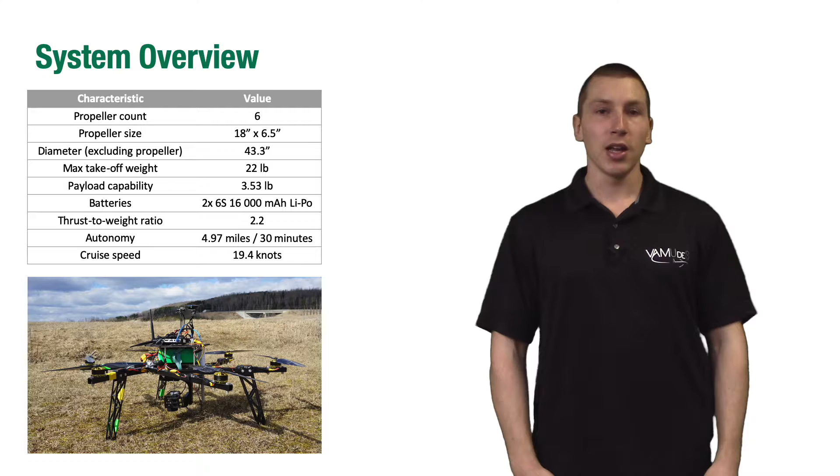This year's flight platform is our hexacopter Orion. It weighs 22 pounds and has a diameter of 43.3 inches. Using values from the AUVSI 2018 competition, it has an autonomy of more than 30 minutes and about 4.97 miles at a speed of 19.4 knots. It has a thrust-to-weight ratio of 2.2.

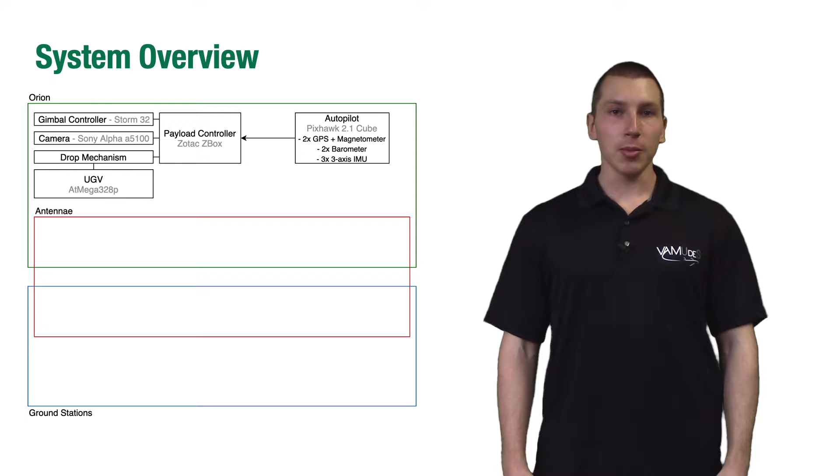Orion's main components are the autopilot, the UGV, and the payload controller, which controls the gimbal, the camera, and the drop mechanism. Orion communicates to the ground control station using 4 different links.

First, a 5.8 GHz omnidirectional antenna for the payload link. Second, a 2.4 GHz antenna for the pilot link. Third, a 900 MHz RFD 900 Plus for the telemetry. And also a 915 MHz 3DR antenna for the UGV.

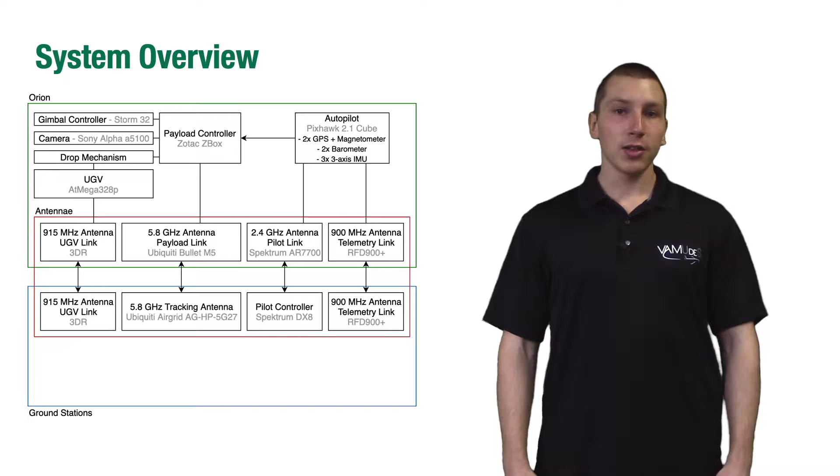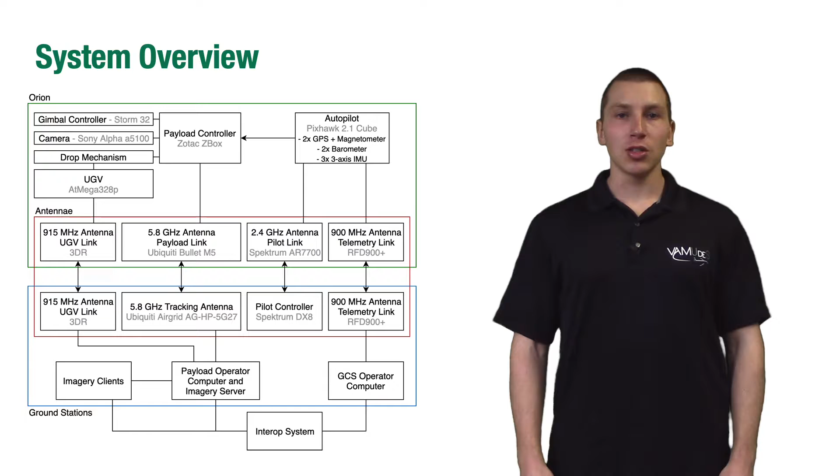All the ground control station computers are connected to the Interop system. The payload computer receives the images and sends them to the imagery clients. The GCS computer sends the telemetry to the Interop system, and the imagery clients tag the images and send the target to the Interop. All tasks will be attempted at the competition.

We have high confidence in the autonomous tasks: the waypoint navigation, the stationary obstacle avoidance, as well as the object characterization, geolocalization, and actionable tasks. However, we have medium confidence in the air delivery drop and drive-to-location task, since it has never been tested in competition.

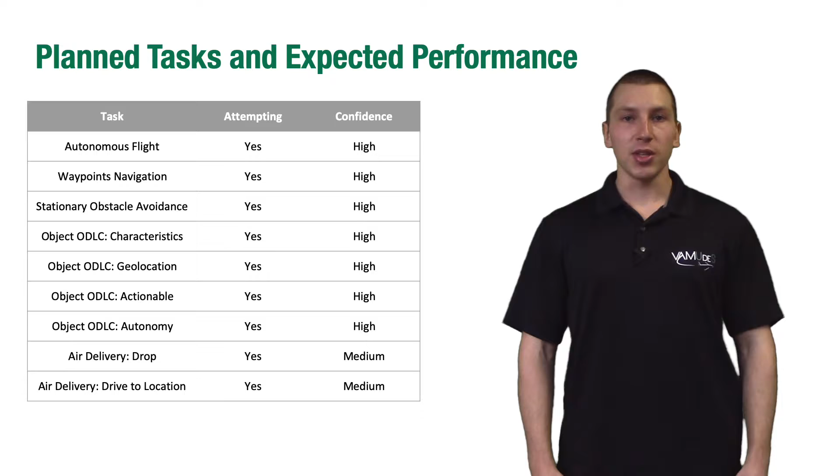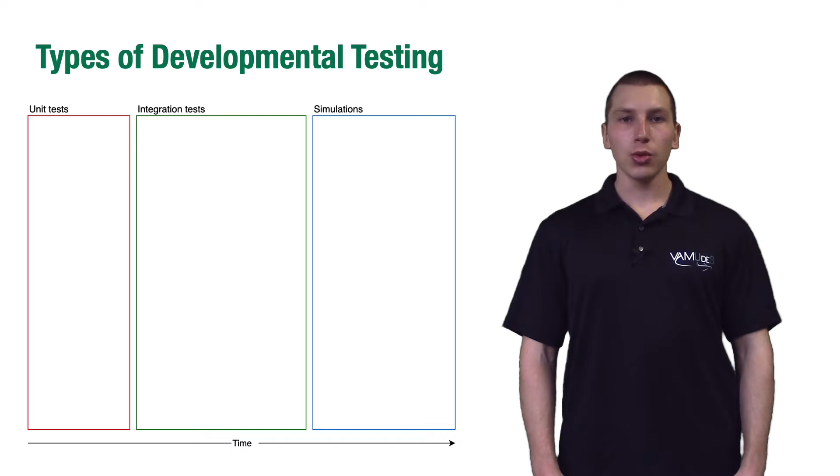Many tests were executed throughout the year to ensure the platform is working as expected and to reduce the risk of crashing. These tests are separated into 3 different categories: first, the unit test, then the integration test, and lastly the simulations.

The unit tests are where every subsystem is tested individually. Once they are working as expected and do not represent a danger for the UAS, they are integrated into the UAS. Integration tests ensure every subsystem works together and does not interfere with each other.

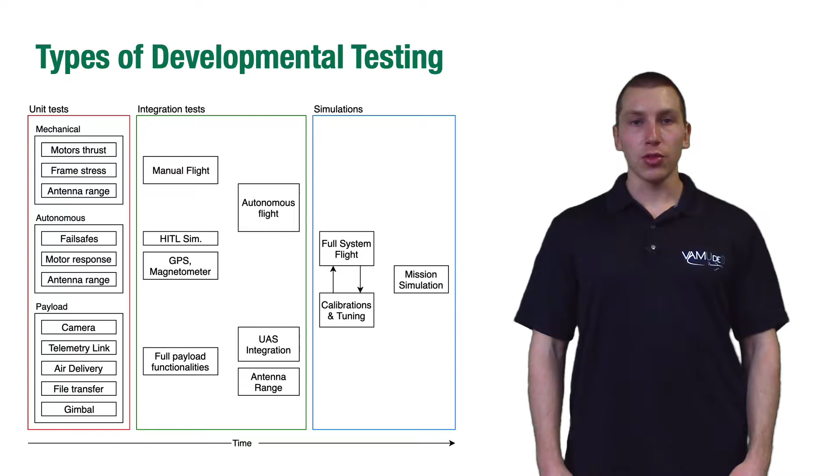Lastly, simulations. Every system is tested in the air, running several practice flights. Once every system is working, full mission simulations are conducted.

For the autonomous flights, we started by testing and calibrating our autopilot. After, we tested the different systems on the drone, such as the ESCs and motors, to see if they responded correctly to the commands given by the autopilot; the antennas, to make sure they were reliable at least 2 kilometers at a speed of 64 kilobytes per second; the magnetometer and GPS, to ensure it knows its position and attitude; and the fail-safes, to make sure that in case of a failure of the drone, it remains safe for the surrounding people.

Since all the systems worked perfectly on the ground, Orion was then tested in flight. During its first flights, the PID was adjusted to optimize flight time and precision.

Since the drone flew perfectly well in manual modes, autonomous flight modes such as auto takeoff, auto land, and autonomous flights were tested without the payload to begin with, and with the payload afterwards.

Since then, the UAV conducted different autonomous flight operations, including 3 different competitions in full autonomous mode. Since the UAV hasn't changed from last year's competition, we are really confident of the accuracy of the waypoints. In fact, last year we had an average accuracy of about 3 feet, and we hope to do even better this year, because our flight tests show we can go down to an average of 1.5 feet.

For the autonomous flight planning, first we connect to the Interop to retrieve mission details. We can see on the map the airdrop location and the obstacles. After, we create a flight plan that achieves waypoint, airdrop, and search area tasks.

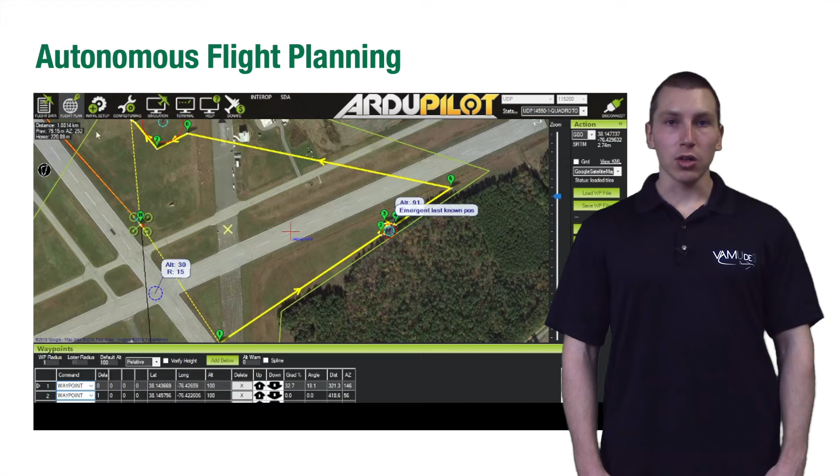Lastly, we reroute the flight plan to avoid obstacles. Obstacles are avoided by creating waypoints around every obstacle at a safety range of 10 feet.

The imagery system is composed of a 24-megapixel Sony Alpha A5100 camera, as well as a custom-made 2-axis gimbal that is made to be small and lightweight. The imagery system has been tested several times in the air, as it is also used for another competition.

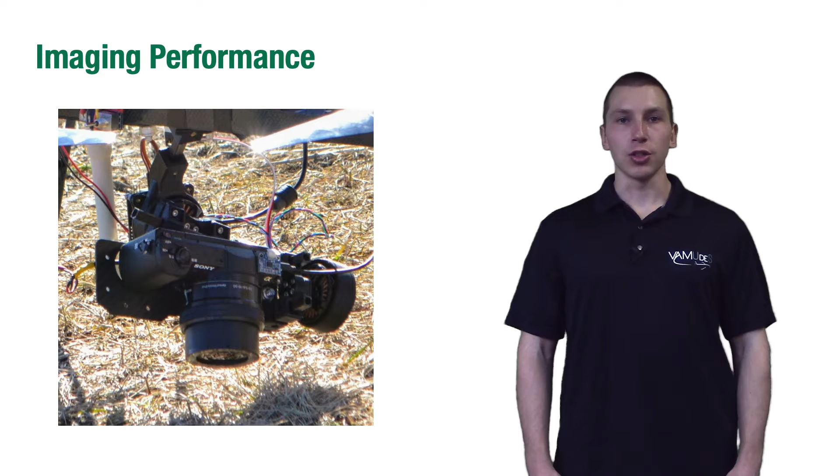The payload link is connected to a 360 degree tracking antenna that is used to transfer the images and command the payload controller. It achieved a data rate of 65 megabits per second at a range of 1 mile, which is more than twice the required bandwidth and more than the estimated distance that we will fly at the competition.

Camera settings are set to optimize image clarity. Shutter speed is set to compensate for vibration and aircraft speed. Rubber dampers are installed to reduce camera vibration, and we use a manual preset focus to avoid blurry images. We can use a fixed focus because the ODLC task is achieved at a fixed altitude of 170 feet.

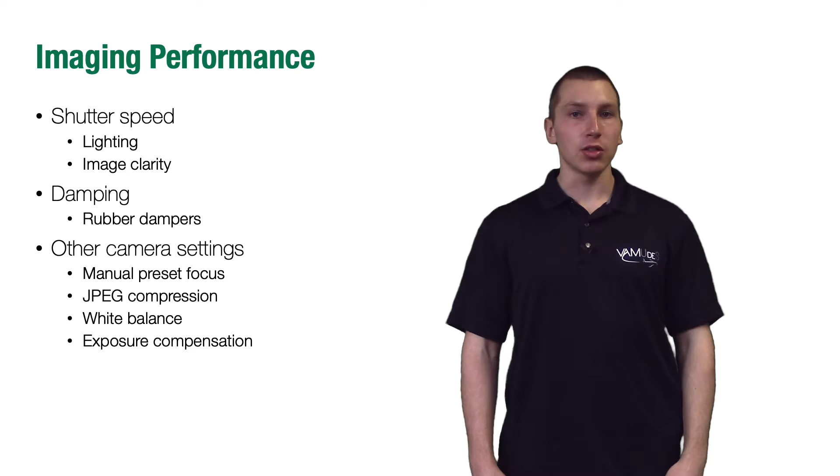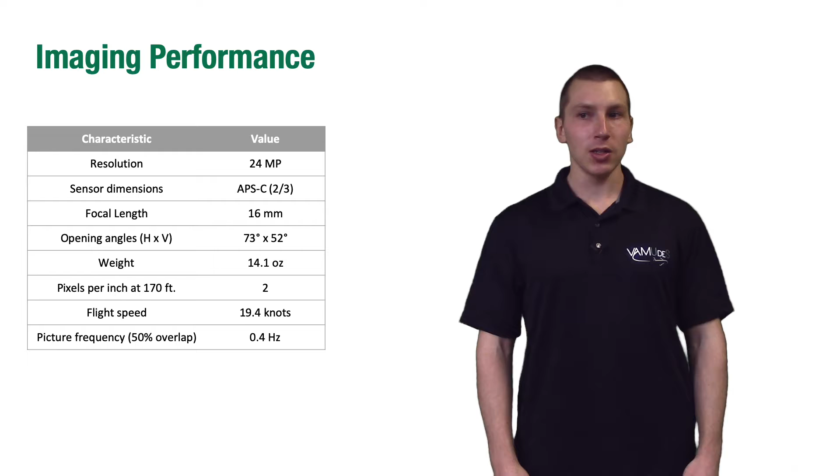White balance and exposure compensation are adjusted to characterize targets more efficiently. With a 24-megapixel camera, it gives a 2 pixel per inch resolution at 170 feet of altitude, which is enough to identify targets. 0.4 Hz picture frequency at 19.4 knots of speed gives 50% image overlap to avoid missing any targets. Here are 2 images taken from last year's AUVSI competition.

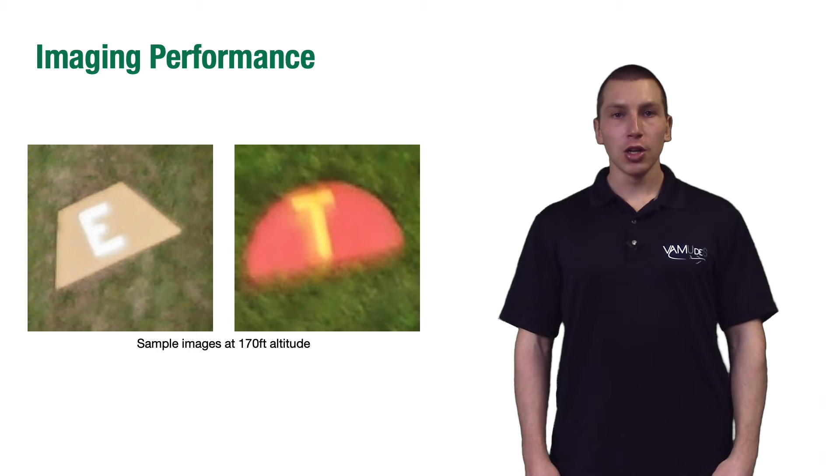We can expect slightly better image clarity due to the new shutter speed setting and the new gimbal damping.

To improve localization performance, 5 practice flights were made to calculate the time compensation needed between telemetry and image timestamps. Delays are needed to compensate for sensors, data transmission, and telemetry update frequency. During practice flights, 26 targets were located at an average accuracy of 7.7 feet.

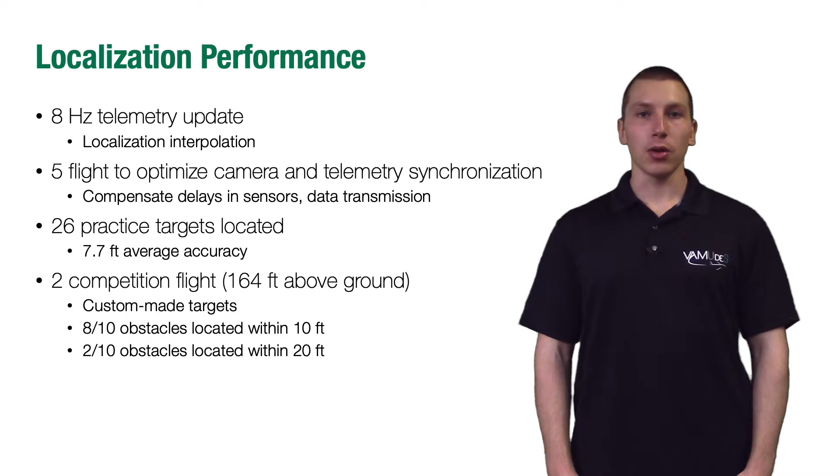2 competition simulation flights were conducted at an altitude of 164 feet. During the simulation, 8 out of 10 targets were located within 10 feet, and 2 out of 10 targets were located within 20 feet. Location accuracy was calculated using photogrammetry software Agisoft, which creates a map of the zone and calculates error in location of each image.

Camera, telemetry, gimbal, and file transfer are all tested individually before installing them on the UAV. For example, manual and automatic camera trigger are tested, as well as making sure that the telemetry matches the image's location. Integration tests are then conducted, and systems are optimized to achieve a maximum score at the competition.

For example, photo geolocation is optimized to compensate for camera delays in sensors, tracking antenna positioning and offset is optimized to achieve a maximum data rate, and automatic camera start and stop for the search area is tested to make sure that the camera starts at the beginning of the search area and stops when exiting it.

To ensure the payload operator is aware of the payload air controller state, live visual feedback is shown on the ground control station payload software, Nexus Command.

The automatic detection and classification of the image will be done in 4 steps. The table below outlines the different tools and manipulations used in each phase of the analysis. First step, we will find areas of interest in the image. If the operation is a success, we will find a shape in the area of interest. Third, we will find a letter in the shape. And finally, we will find the color of the shape and the letter.

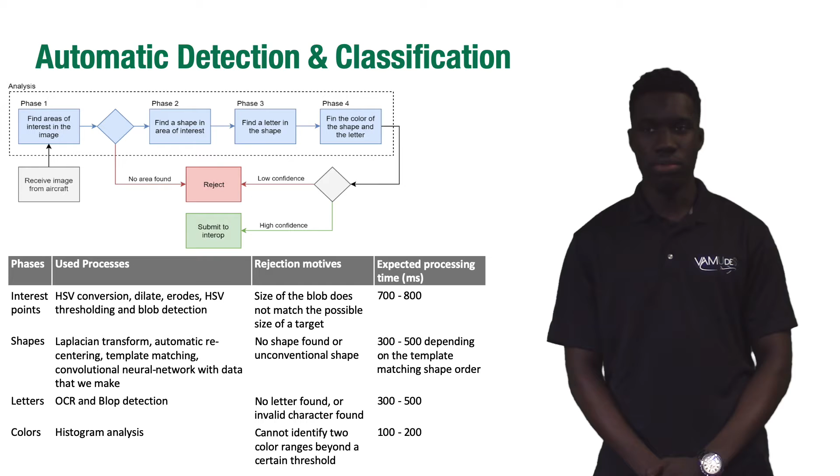This solution was developed preferring false negative to false positive. We test the system by using past year competition images.

In our test, the system was able to find every target. The hardest target to find was the yellow and orange star.

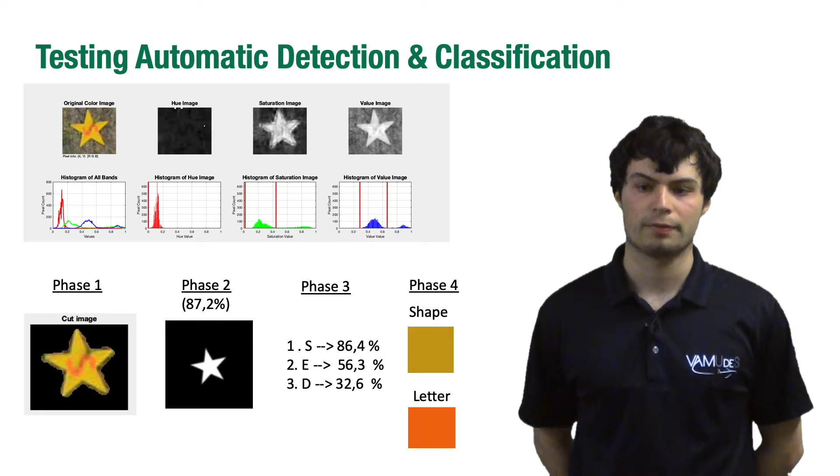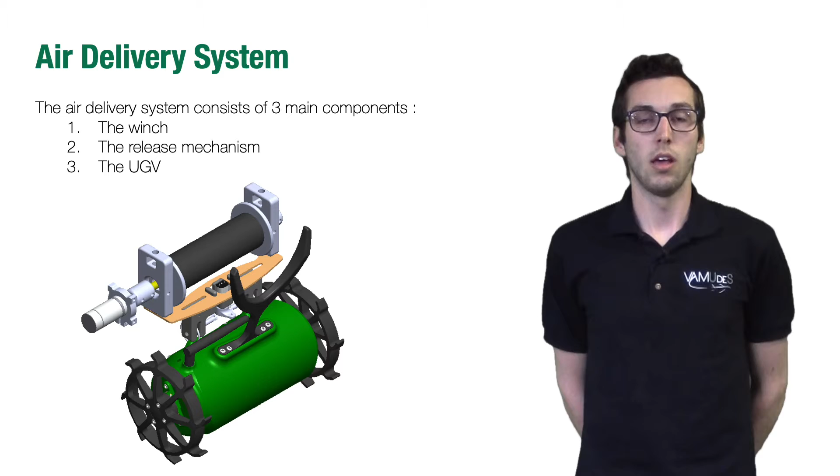This year, air delivery was a real challenge. To achieve this task with success, the team chose to use a winch combined with a custom release mechanism. This system allows us to drop the UGV gently while respecting the minimum altitude of 100 feet with the UAV.

The UGV will transport the water bottle during all the mission. It will be delivered from the UAV by a 100 feet long winch. Once released on the ground, the UGV is able to move to a different target.

The UGV is a complete custom design from the team. It is equipped with all the necessary components and telemetry to achieve the task. The UGV has a special design, giving us the opportunity to transport a water bottle while being the smallest.

A two-wheel drive configuration was chosen to save on the number of motors and wheels to keep the weight as low as possible. Two small DC motors ensure the UGV motorization. They are capable of rotating at a speed of 90 RPM, giving a linear speed of about 1.85 feet per second. Finally, the UGV has an autonomy close to 22 minutes, which is more than enough to achieve its mission.

The UGV control system is built around a custom ATmega328P based autopilot. It contains a 3-axis magnetometer, gyroscope, and accelerometer. There is also an altimeter and a GPS receiver for accurate localization of the UGV. A 915 MHz radio will allow for remote telemetry and disabling of the UGV in case of a problem. A dual H-bridge motor driver allows for differential drive of the UGV.

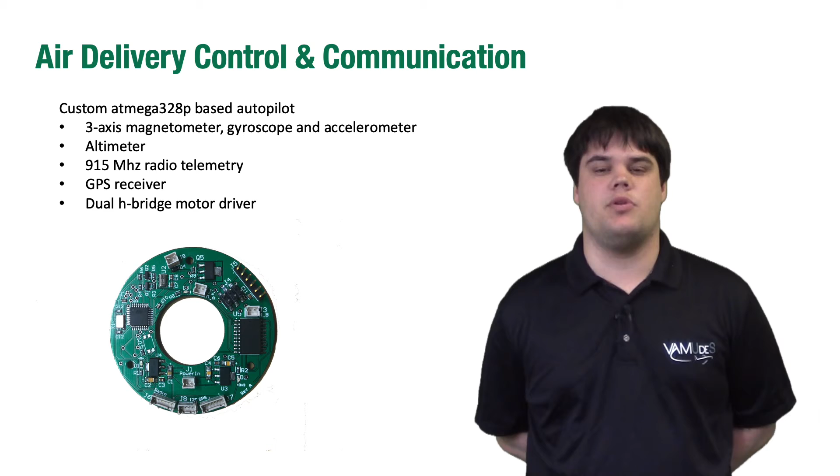The theory of operation of the air delivery happens as follows. The UAV needs to take off and reach an altitude of 100 feet or more. Once this altitude is reached, the UGV is armed and ready for release. The UAV will then move to the required drop location and initiate the delivery.

Once the UGV reaches an altitude of 25 feet, it initiates a 45 second release countdown. This assures the UGV gets dropped if the altimeter gets a wrong reading or if the winch gets stuck. The UGV will keep descending as close to the ground as possible. At an altitude of 6 feet or less, the UGV will initiate the release of the adapter plate.

The UGV is now safely released and seeking its destination using GPS guidance. The adapter plate can now be wound up by the drop mechanism. The UAV is then able to leave the dropping location and continue its mission.

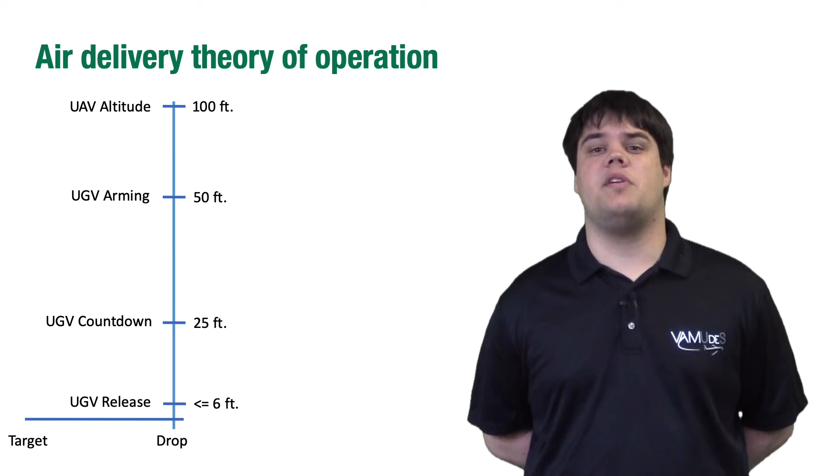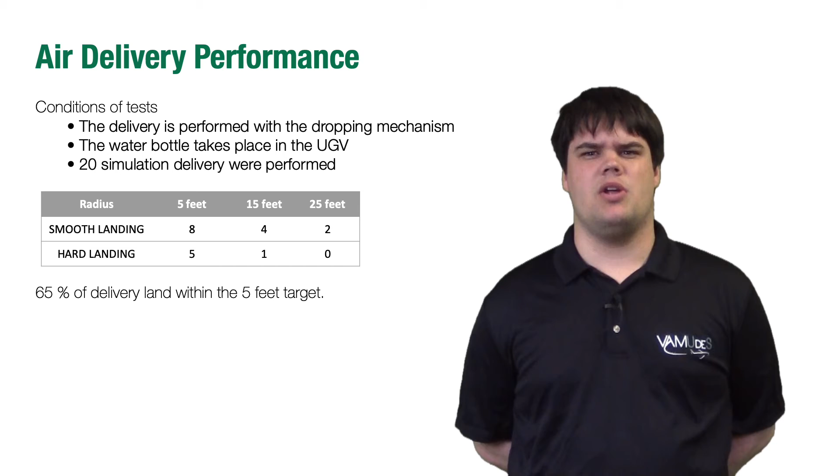We tried our air delivery system 20 times and got consistent results throughout our test. We had a 65% chance of reaching within a 5 foot radius of the target. Multiple outside conditions were used in our test which allow for accurate results. The team is confident the UGV will be delivered safely and precisely to the target.

Once every system was working individually, we started doing full mission simulations to ensure the team was ready for the competition. First, we did ground simulation, which included pre-flight preparation and post-flight processing with previous datasets. We also used flowcharts and checklists.

Once the ground mission simulations were made and the team was ready, we did full air simulations, which included a full mission sequence. To be able to achieve flight simulation, we had to set up an interop system with waypoints, airdrop location, as well as an off-axis target.

We populated a search area with targets that we had to identify, and we did all the tasks required for the competition, including the UGV drop and drive to location, and obstacle avoidance.

Another very important part of our testing included participation in another competition, Unmanned Systems Canada. At this competition, we had to do target location as well as target measurement and air delivery, which is very similar to this year's AUVSI competition. We successfully achieved target location and measurement as well as the air delivery.

After all the simulations and tests made, we were able to draft a table of our expected results for this year's competition. As you can see, we aim to play to our strengths, which are autonomous flight, stationary obstacle avoidance, waypoint navigation, as well as object detection, localization and classification. We were able to approximate our overall result to about 80%.

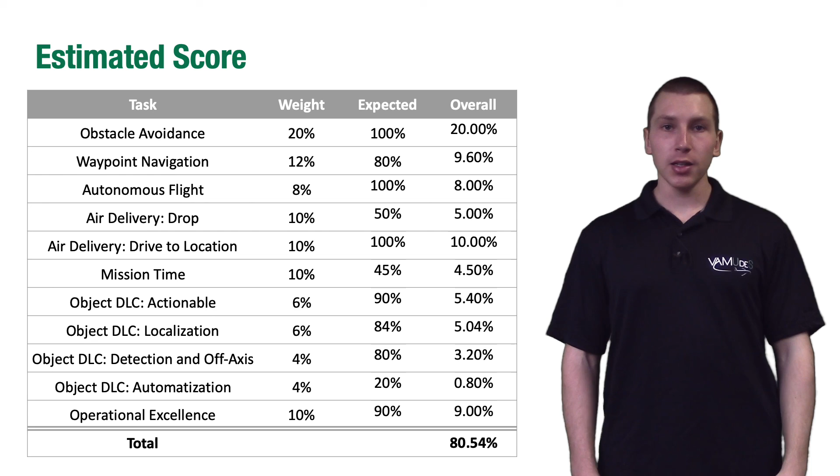As you saw during the presentation, our systems are safe and ready for the competition, and we aim for top 5 this year. Thank you.